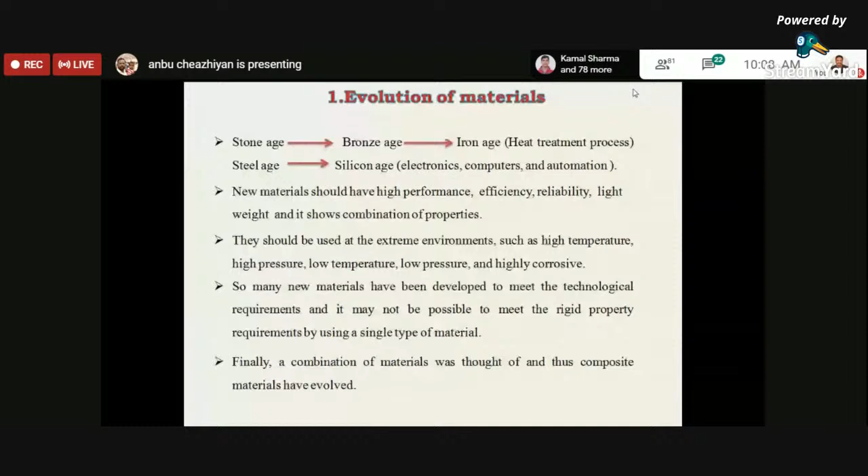Next we go for composite materials. There are a lot of definitions available for composite materials, but technically, composites are heterogeneous at the microscopic level but statistically homogeneous at the macroscopic level. Apart from that, I have given another definition: composite materials are those which are formed from two or more materials, producing properties or characteristics that could not be obtained from any one material.

Technically, composite materials are heterogeneous at a microscopic level but statistically homogeneous at a macroscopic level. Various materials that have dispersed phases exist in nature, such as metals, alloys, and processed polymers, but we cannot call these composites because their properties are similar to those of the base constituents. For a material to be a composite, certain conditions should be satisfied. The first is that the combination of materials should result in a significant property change.

Another is that the content of constituents is generally more than 10%. The third is that the property of one constituent is much greater than the corresponding property of the other constituents. These conditions must be satisfied for it to be a composite material. We have different types of composites: metal matrix composites, ceramic matrix composites, and fiber reinforced composites. Based on the application, researchers focus on several of these.

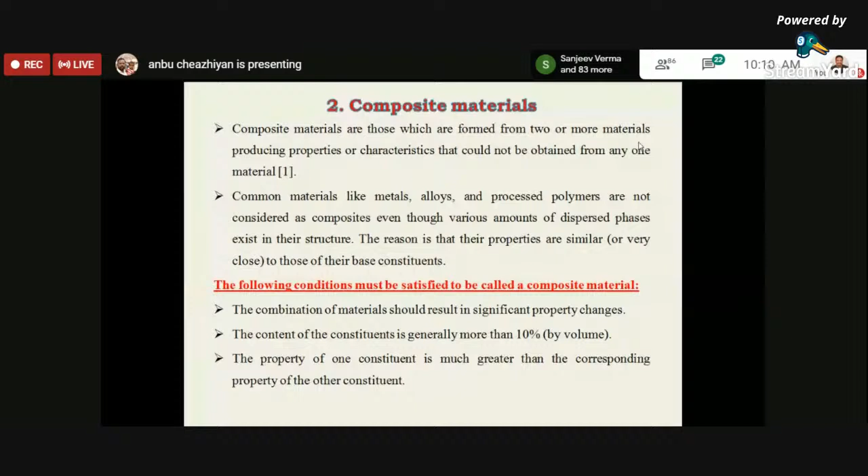Metal matrix nanocomposites are materials that incorporate nano-sized particles into a matrix of standard material, that is, a metal matrix filled with nanoparticles. The biggest advantage of nanoparticles is that we can improve the strength compared to polymer matrix. High strength, modulus, wear, and high temperature can be improved significantly. Using nanoscale reinforcement, general properties such as tensile and compressive behavior can be increased.

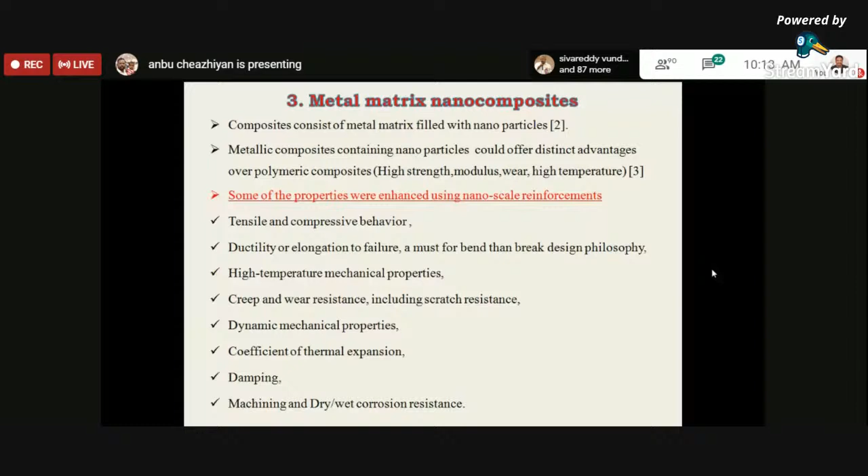These are the challenges facing the development of metal matrix nanocomposites. The greatest challenges for wide application are the cost of nanoscale reinforcement and the complexity of synthesis and processing of nanocomposites. For the properties of metal matrix nanocomposites to be increased, there should be uniform distribution of reinforcements, a suitable volume fraction of reinforcement, and good interfacial strength between the matrix and reinforcements.

So as I told you earlier, the processing of nanocomposites is very difficult because particle agglomeration, or formation of clusters, will occur. So this is a major drawback in nanocomposites. This has been resolved by varying the process parameters, such as stirrer design, stirrer speed and stirring time, and also by using the vortex method we can resolve

some problems. Also, nano-sized particles have high surface area. Due to that, the nano-sized particles naturally tend to agglomerate to reduce the overall surface energy, making it difficult to obtain uniform dispersion. So that is a major problem. Another thing is, as we increase the percentage of reinforcement, the surface area of the particles tends to increase, and hence particle agglomeration. A minimum amount of agglomeration can be seen in the matrix material.

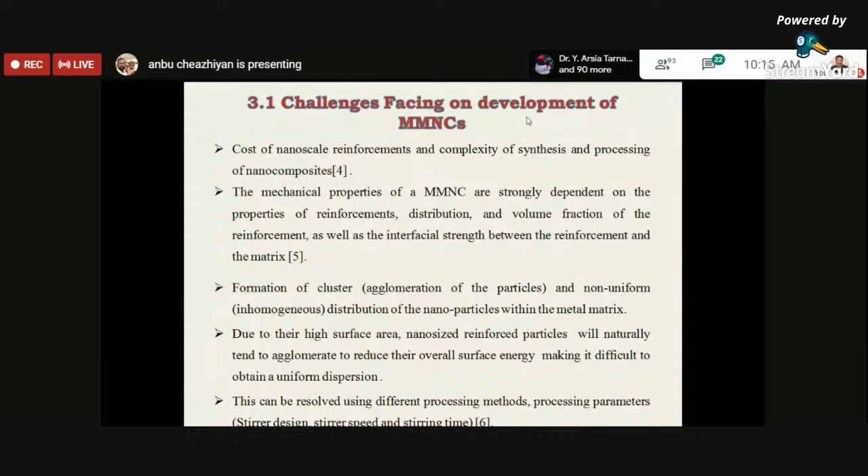So next I'm going to discuss the mechanisms of nanocomposites. The yield strength of a metallic material is the stress required to move dislocations and to activate dislocation sources. Generally, metal matrix composites are strengthened by Orowan strengthening, enhanced dislocation density, load bearing effects, and grain boundary refinement. These are called strengthening mechanisms.

In the Orowan mechanism, it is the obstacle caused by closely spaced hard particles to the movement of dislocations. In conventional micron-sized particle reinforcement, the reinforcement particles are coarse and the interspacing is large. But in the case of nanoparticles, it is favored with highly dispersed particles.

Next we will see enhanced dislocation density. Thermal stresses arise around the particles, because the matrix and reinforcements are characterized by different coefficients of thermal expansion. The stress level is often large enough to cause plastic deformation in the matrix-reinforcement interaction region, thus inducing high dislocation density.

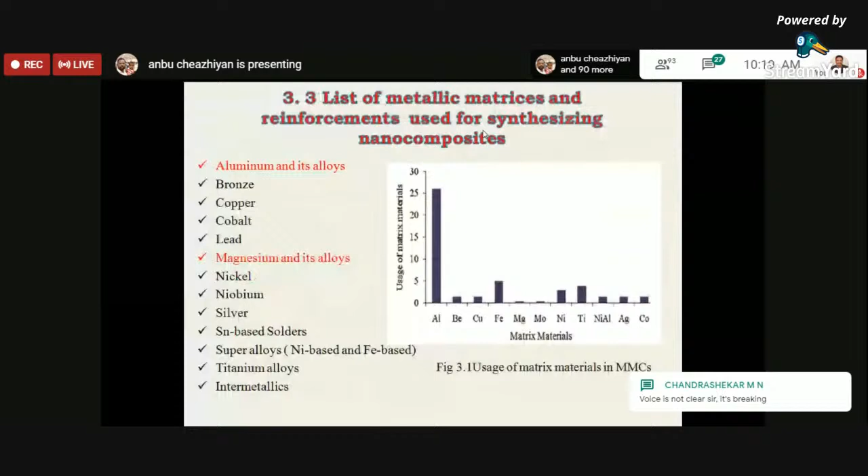Sorry to disturb you, sir. Excuse me, sir. Hello. Sir, your voice is not clear, it is slightly breaking. Actually, there was some connectivity problem. Is it right now? Yes, sir, now it's okay. Okay, so then I have to keep my mic.

Okay, so these were the common metal matrices used for synthesizing nanocomposites: aluminum and its alloys and magnesium and its alloys. Aluminum and magnesium have lower density: aluminum is 2.7 grams per cubic centimeter, magnesium is 1.8 grams per cubic centimeter. By including low density materials, we can further reduce the density of composites. That is the objective of the researchers.

In most of the research on matrix materials, aluminum is used, and then magnesium. Synthesizing magnesium is limited because it's very difficult: during synthesis, when it reacts with oxygen, it forms oxides, and it is highly pyrophoric in nature. Because of that, they didn't go for magnesium matrix, but using new processing methods, researchers have concentrated on magnesium matrix. Now a lot of research papers are coming out on magnesium matrix composites.

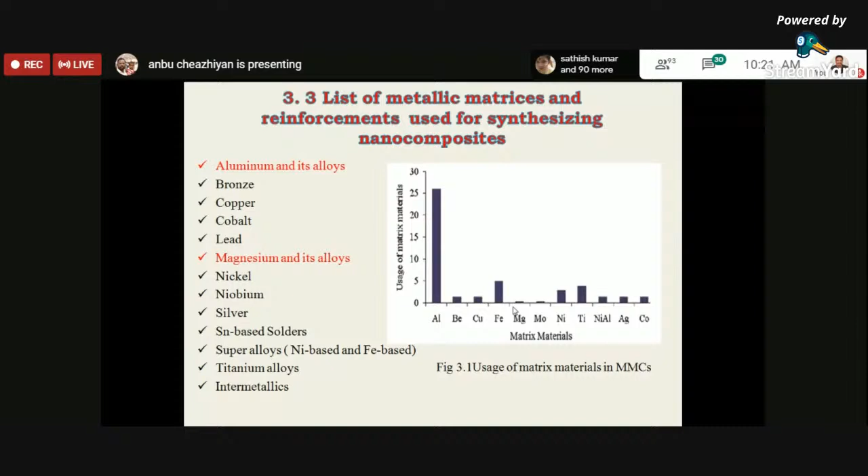Sometimes they go for the addition of two reinforcements, hybrid composites. In that, they go for another reinforcement called boron nitride, whose density is very low, and sometimes they go for molybdenum disulfide or graphite. They act as good solid lubricants, especially used to improve wear resistance and corrosion resistance properties. So I have given the types of reinforcement.

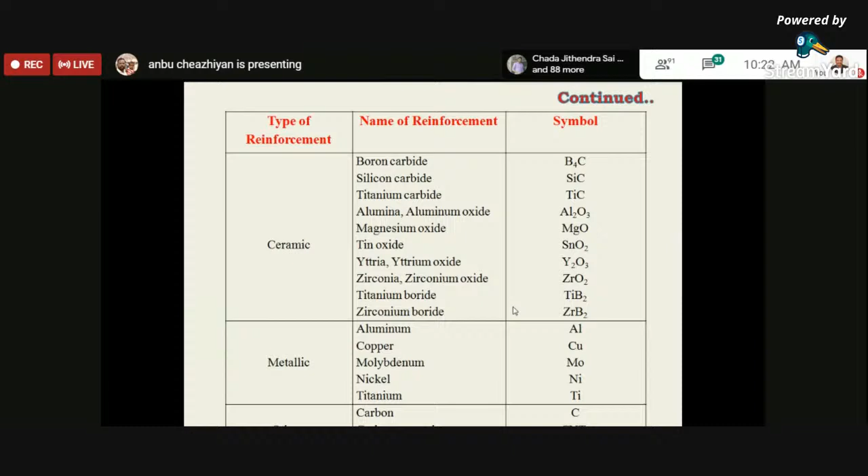For selecting the reinforcement for synthesizing nanocomposites, the following conditions should be satisfied. This is a general thing. It should increase the yield strength and tensile strength at room temperature or elevated temperature while maintaining ductility. Next is increase of creep resistance at elevated temperature, increased fatigue strength, improvement of thermal shock resistance, improvement of wear resistance, increase of Young's modulus or reduction of coefficient of thermal expansion. These are the things we need to consider while selecting nanoparticles for synthesizing nanocomposites.

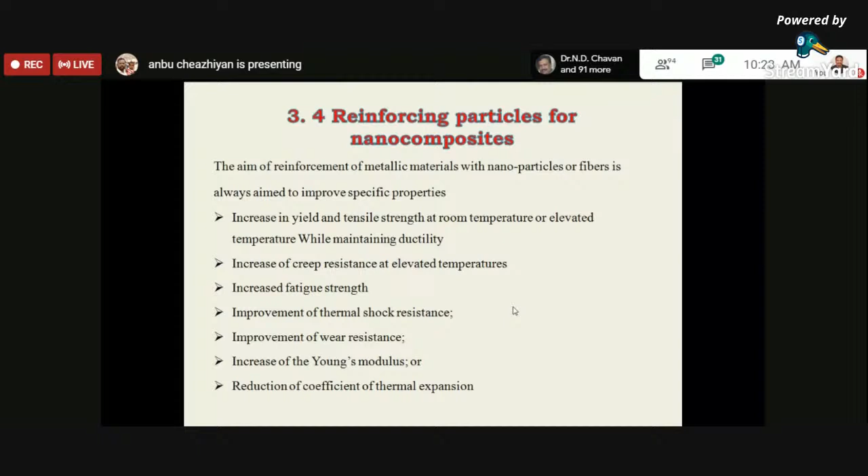So here I have given aluminum matrix composites. As you all know, aluminum matrix composites are widely used in automobile, marine, and transport industries due to high strength to weight ratio, good stability and formability, high elastic modulus and thermal conductivity. It is also known that the mechanical strength can be increased by precipitation hardening.

So this is aluminum, and these are the major alloying elements that can be added along with aluminum: copper, zinc, magnesium. Here these are the series: 99% aluminum, aluminum copper alloys, aluminum manganese alloys, aluminum silicon alloys, aluminum magnesium alloys, aluminum zinc alloys, and lithium alloys. This is a recent material that we are evaluating, since the density of lithium is very low compared to the others, but it is highly pyrophoric in nature.

These aluminum alloys are used in various industries, but we are concentrating on marine applications, that is superstructures, structural components, assembly nodes, components for mechanical functions, and especially in the manufacture of ribs, hulls, all those things.

There is a major drawback in this aluminum. At aging temperature, the coherency between the precipitate and matrix lattice disappears due to the growth of reinforcing particles, and hence it loses the hardening effect. As a consequence, the strength of the alloys decreases, mostly at 200 to 300 degrees centigrade. In that case, the inclusion of ceramic reinforcement tends to increase such properties.

So this is the experimental methodology that we have found. Aluminum alloy Al7075 is used as a matrix material, and there is a chemical composition.

Here we have used aluminum with boron carbide and boron nitride as reinforcement. We have varied the percentage of boron carbide at 3%, 6%, and 9%, and kept boron nitride constant at 3%. The particle size of boron carbide and boron nitride is less than 50 nanometers, which is commercially available from the market, from Sigma Aldrich, and used as reinforcement.

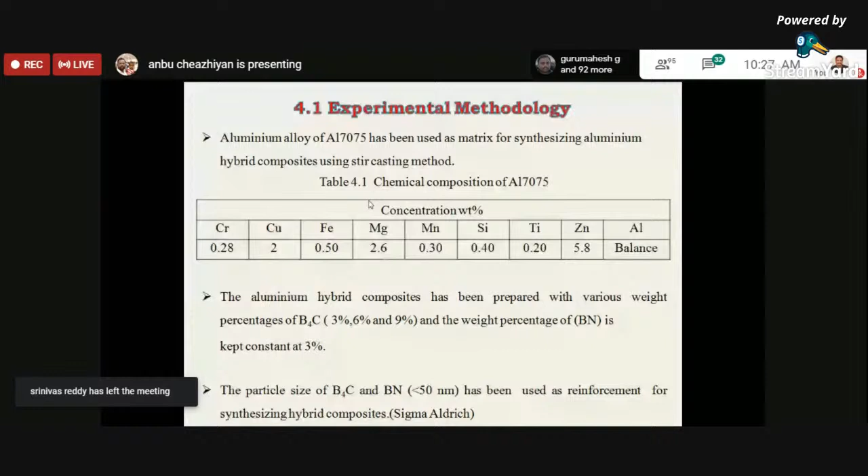These are the processing methods followed for synthesizing aluminum hybrid composites. Al7075 alloy is melted in a resistance heating furnace at 700 degrees centigrade.

Since there is magnesium content in the alloy, it should not be oxidized, so we have gone for an inert atmosphere environment. We supplied argon and SF6 gas at a minimum of 3.5 liters per minute. Since magnesium enhances the wettability of matrix and reinforcement, it should not be oxidized, so for that purpose we have gone for a closed environment setup.

In order to have a homogeneous melt, the temperature is increased to 750 degrees centigrade. Then the reinforcement particles are preheated to 350 degrees centigrade to remove moisture present in them, which also helps avoid oxidation. We then increased the temperature of the melt to 850 degrees, the maximum limit.

Then we added reinforcement of boron carbide at 3%, 6%, 9%, with a constant 3 weight% of boron nitride, through an external screw into the molten space. The stirring speed and stirring time were maintained at 600 rpm and 20 minutes respectively, in order to obtain homogeneous distribution of reinforcement in the matrix melt.

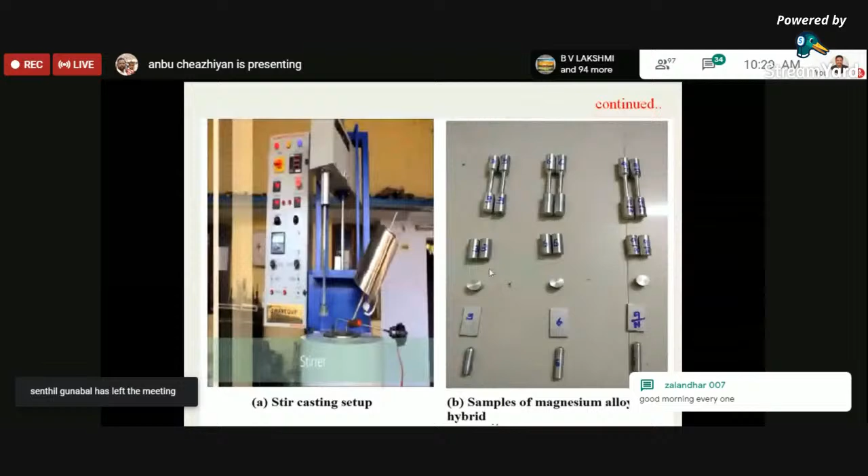These are the stir casting setup that we have used, and these are the materials performed as per ASTM standards. We have two sets of samples prepared for tensile, compressive, hardness, corrosion, and wear resistance testing.

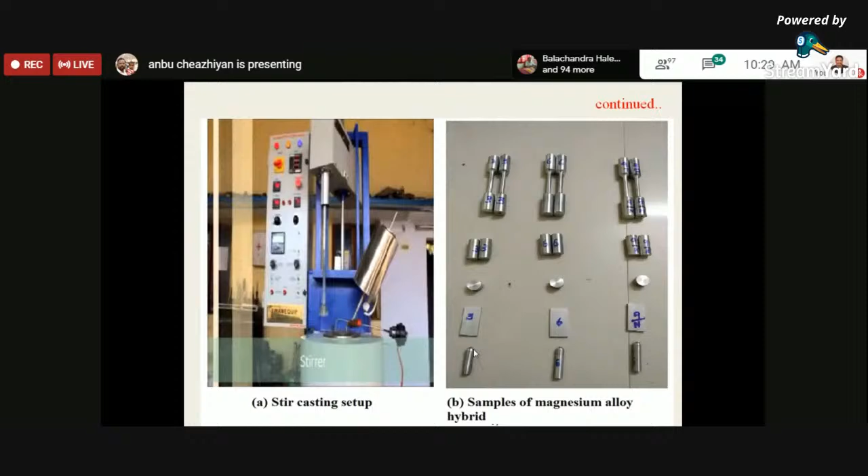These are the performance measures. The optical microscope has been used to study the microstructures, and scanning electron microscopes are used to find the distribution of matrix and reinforcements. Vickers micro hardness test has been used to study the hardness of composites, and the universal testing machine (UTM) is used to study the tensile and compressive strength of composites.

This is the salt spray test chamber that we use to find the corrosion properties of aluminum hybrid composites. Since these materials are mainly used for marine applications, as I told earlier, we have gone for the salt spray apparatus.

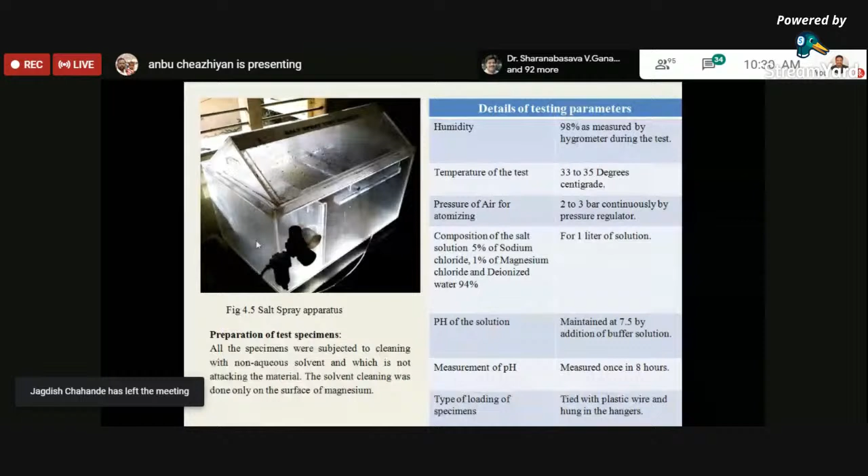These were the testing parameters maintained for corrosion resistance: 98% humidity measured by hygrometer during the test, temperature maintained at 33 to 35 degrees centigrade, and pressure of air at 2 to 3 bar. We applied a salt solution of 5% sodium chloride and 1% magnesium chloride in deionized water, for 1 liter of solution. Every few minutes it will spray automatically.

So that is the sprayer. All the specimens were subject to cleaning with a non-aqueous solvent which does not attack the materials. The solvent cleaning was done only on the surface of the aluminum, sorry, the magnesium, as I mentioned.

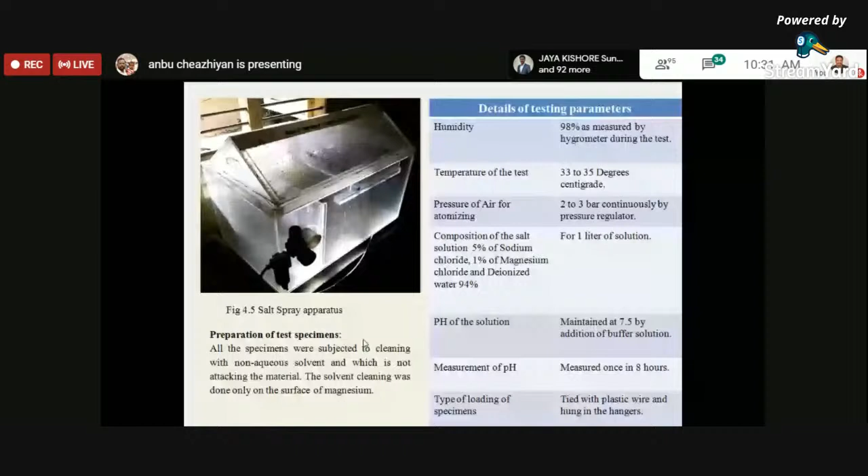It is clearly evident that at increased temperature of molten metal, the reinforcement particles cannot be dissolved to maximum, and hence it appears as a fine globular species in some regions of the matrix alloy. So it appears that it can be dissolved fully, so that it appears as a fine globular species in the matrix.

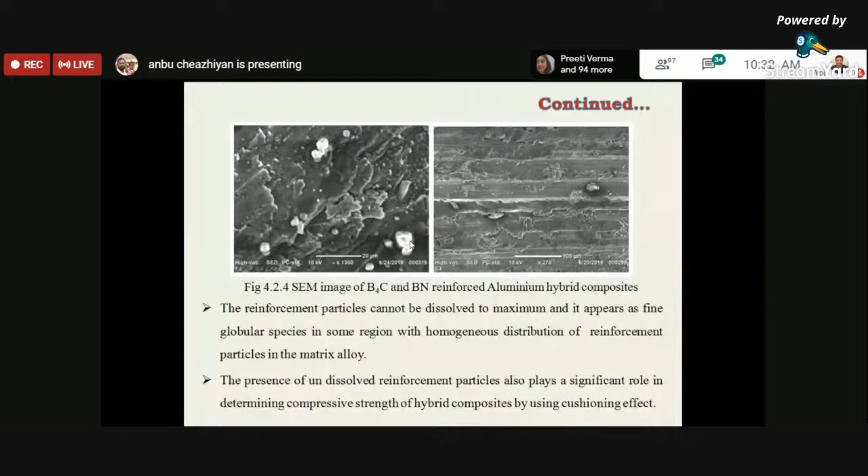This can also be used as a good behavior in compressive strength. It also shows that the matrix aluminum shows a fine interdendritic pattern of grains and are precipitated at the grain boundaries.

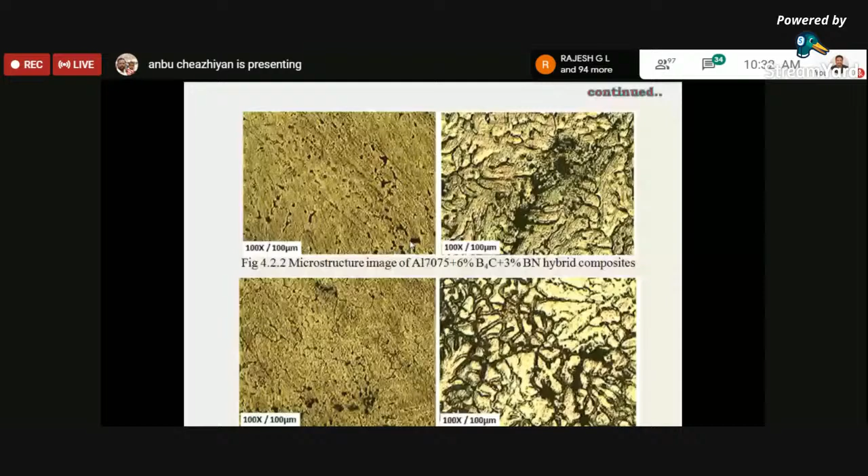From the XRD analysis, it is clear that the strengthening mechanism occupies an important place in enhancing the mechanical behavior of aluminum hybrid composites. Here, the presence of boron carbide and boron nitride interacts with aluminum to form Al3BC, AlB12, and AlN interface reaction, and this is the strengthening mechanism which enhances the mechanical properties of synthesized composites.

In that material, we also have aluminum and copper. The presence of copper interacts with aluminum to form Al2Cu. That is mainly used for corrosion resistance. It acts as a barrier, so that has not been found to be an issue.

Next we'll go for hardness of aluminum hybrid composites. The hardness of hybrid composites is increased due to uniform distribution of reinforcements in the matrix alloy, the presence of hard interface particles, and a large difference in thermal expansion between the matrix and reinforcements, which significantly increases the dislocation density in the microstructure of synthesized composites.

In addition, the inclusion of boron nitride, a solid lubricant, also contributes to increasing the hardness of composites. It acts as a barrier along with boron carbide and inhibits the presence of dislocation during indentation. So the hardness of aluminum hybrid composites has been significantly improved compared to the monolithic material.

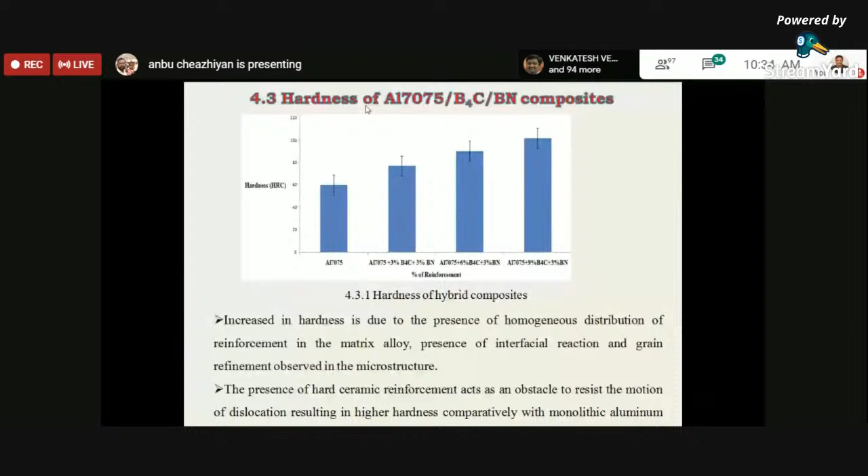Next we go for tensile strength of aluminum hybrid composites. It has been observed that with increase in reinforcement, the ultimate tensile strength increases and the percentage of elongation is reduced. This occurs due to the strengthening mechanism, adequate load transfer between matrix and reinforcements, Orowan strengthening mechanism, and finally the grain refinement and dissimilarities among the thermal elastic performance of synthesized composites.

Here the inclusion of secondary reinforcements exhibits heterogeneous nucleation sites, and hence the further deformation of hybrid composite has been increased significantly. So the percentage of elongation is decreased due to increase in percentage of reinforcements.

Due to the grain refinement achieved by hard ceramic reinforcement, this tends to reduce the superplasticity effect, and hence the brittleness of the composite has increased. This is considered to be a major reason for the reduction in percentage of elongation.

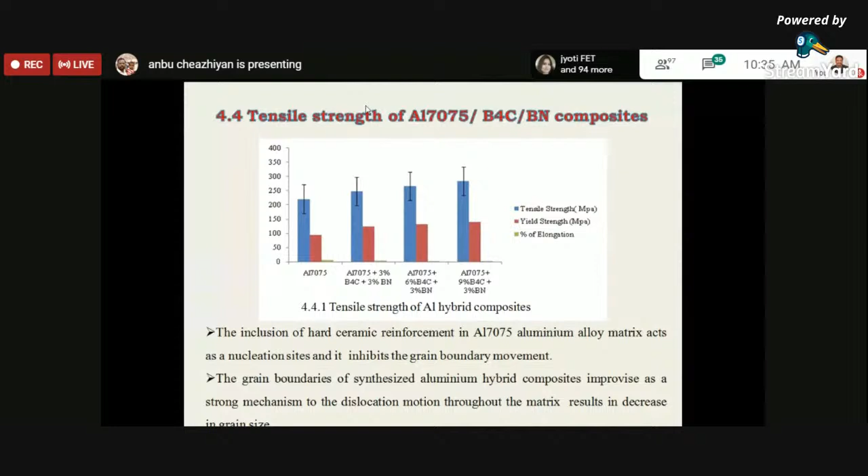So that is the thing I have here regarding the inclusion of secondary reinforcement causing heterogeneous nucleation effects.

During straining, the inclusion of secondary reinforcements disintegrates the strain rate of hybrid composites, and hence the fracture surface of hybrid composites appears to be smooth.

It is also found that because of heterogeneous nucleation, the deformation of synthesized composites occurs at the grain boundaries, and it exhibits plastic deformation which resists the nucleation of grain at the time of compressive loading. So you can see some of the grain refinement which are seen in that figure.

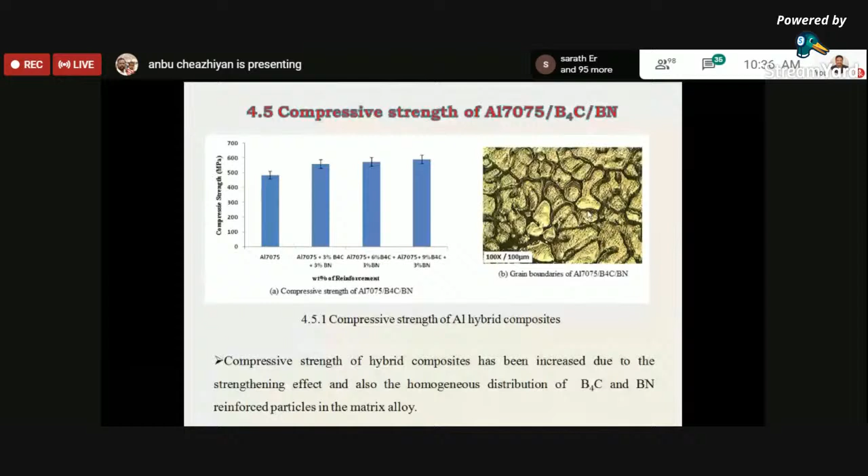Next we go for corrosion resistance. As you all know, aluminum alloys possess high affinity to oxygen, and it is treated as a reactive material. The presence of copper interacts with aluminum to form Al2Cu. This acts as an obstacle for dislocation.

This phase performs reduction of corrosion when the pH is increased. Owing to the disintegration of aluminum, the alloys through the surroundings act as a cathode. This can be overcome by adding suitable ceramic reinforcement or harder ceramic reinforcement.

In these cases, we have added the harder and stiffer reinforcement along with the matrix alloy. Due to that, the corrosion properties of hybrid composites have significantly increased. Additionally, the inclusion of secondary reinforcement acts as a heterogeneous nucleation site and acts as a barrier to reduction in grain growth, and hence the grain size of the composite has decreased. This is also considered an important factor in the increase of corrosion resistance of aluminum hybrid composites.

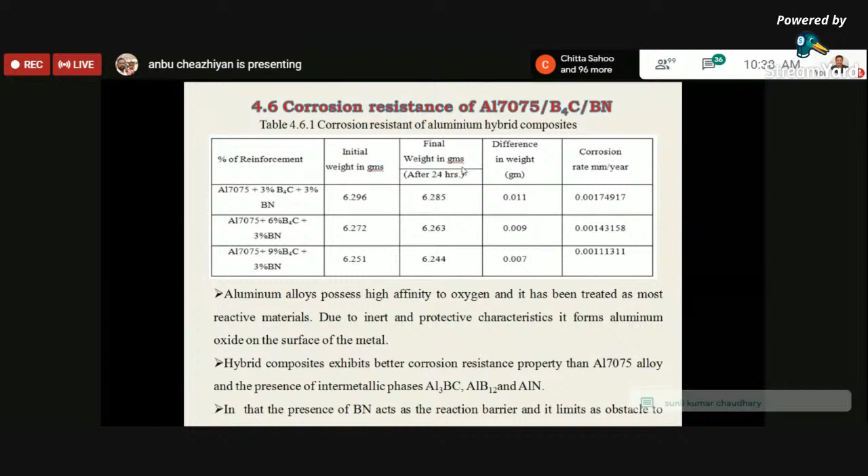Next we will go for wear properties of aluminum hybrid composites using boron carbide and boron nitride reinforcements. Pin on disc wear testing was carried out under dry conditions as per ASTM G99. A sample size of 6mm diameter and 35mm length, steel material EN31, with a surface roughness of 0.3, is used.

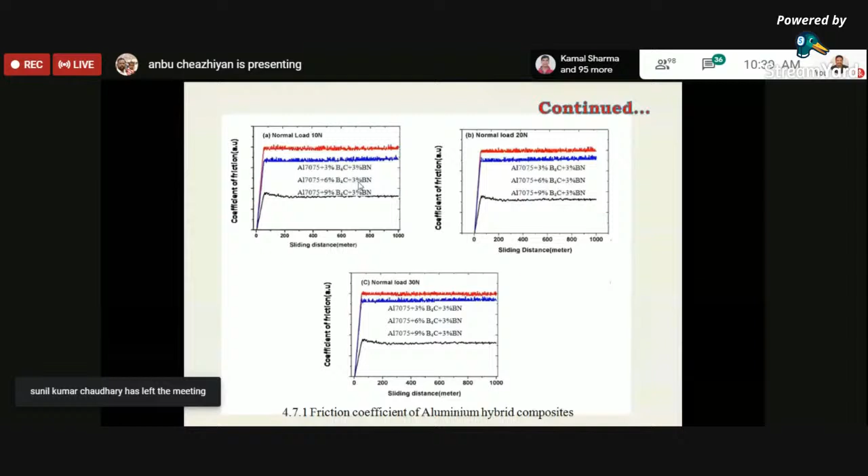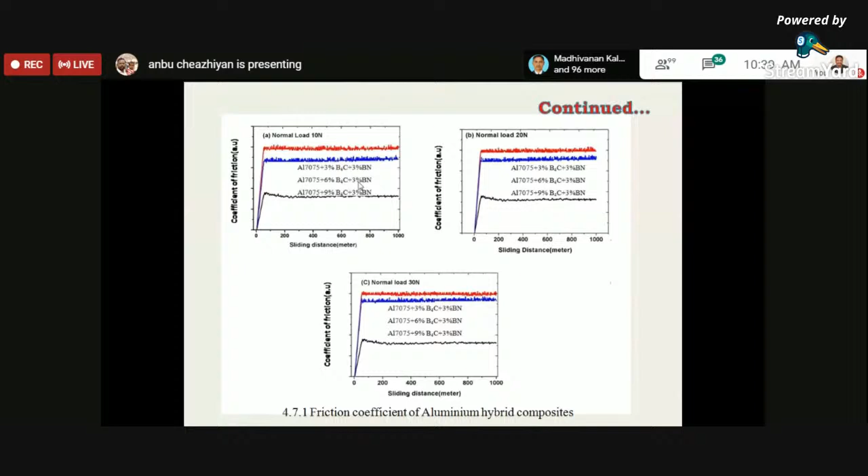The friction coefficient for each material has increased. Using the formula, we calculated the friction to be 0.46 to 0.47 for hybrid composites. The coefficient of friction increases due to the strengthening effect of matrix and reinforcement, and also because dislocations in the alloys become ineffective, causing an increase in hardness, which is the most important factor to enhance wear resistance.

Next, we'll go for worn surface morphology. The worn surface of all specimens under variable load were covered with grooves parallel to the sliding direction, along with some plastic deformation. These grooves are associated with abrasive wear, in which hard asperities on the steel counterface, between the pin, cause wear by removal of material.

It is also observed that due to the presence of hard reinforcement, the presence of adhesive wear is less, and hence the total depth of deformation is smaller in hybrid composites. In addition to grooving, some local plastic deformation and material smearing were observed.

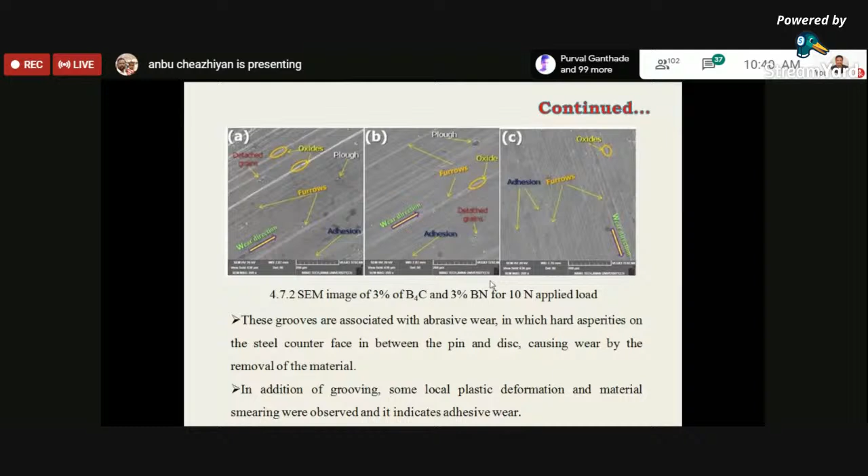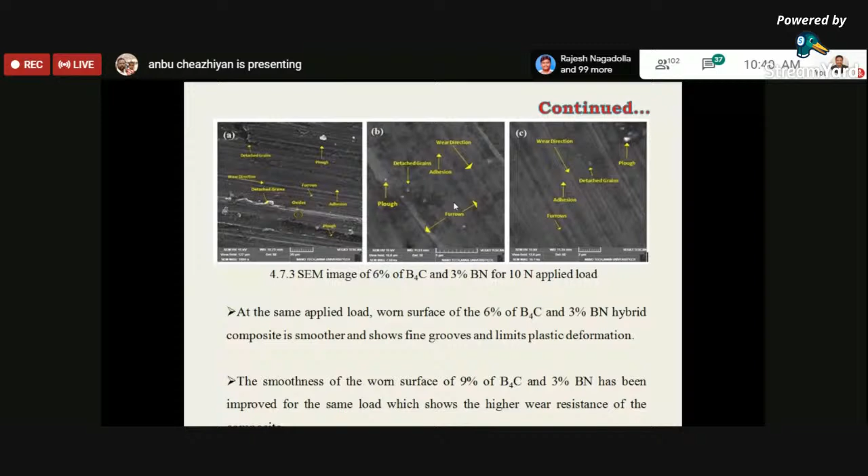In the case of 9% reinforcement, it is further improved. It is observed that the enhancement of wear resistance is due to the improvement of load-bearing capacity of reinforcement particles, and the formation of a transfer layer between matrix and reinforcement, which protects the surface from abrasion.

It is also noted that when the load is increased from 10 to 30 Newton, the worn surface of the synthesized composites gradually shows less adhesive wear and shallow scratches on the composites.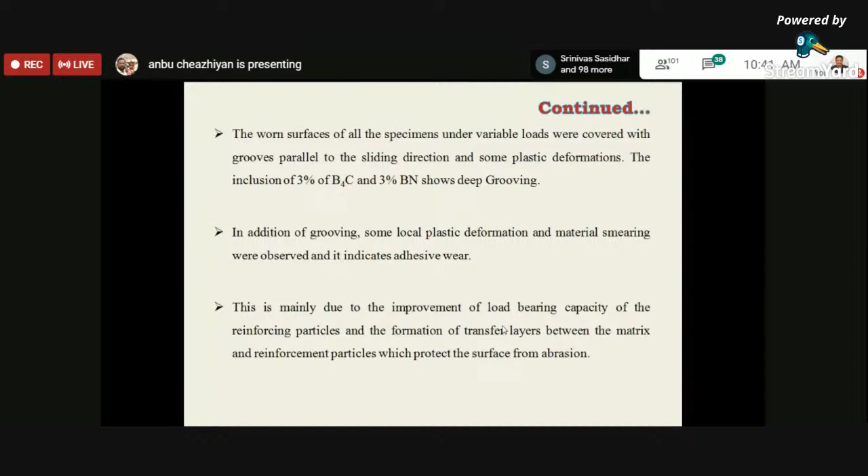Again, it is concluded that the worn surface of all specimens under variable load were covered with grooves parallel to the sliding direction, along with some plastic deformation. The inclusion of 3% boron carbide and 3% boron nitride shows deep grooving, compared to 6% and 9%, where there is grooving with some plastic deformation and material smearing, due to the load-bearing capacity of reinforcement. The formation of a transfer layer between matrix and reinforcement protects the surface from abrasion.

It has been concluded that the nano-sized boron carbide and boron nitride particles are uniformly distributed in the matrix, with a few clusters found around regions of aluminum grain boundaries. They form interfacial reactions as Al3BC, AlB12, and AlN. This acts as a strengthening mechanism to enhance the mechanical properties of composites.

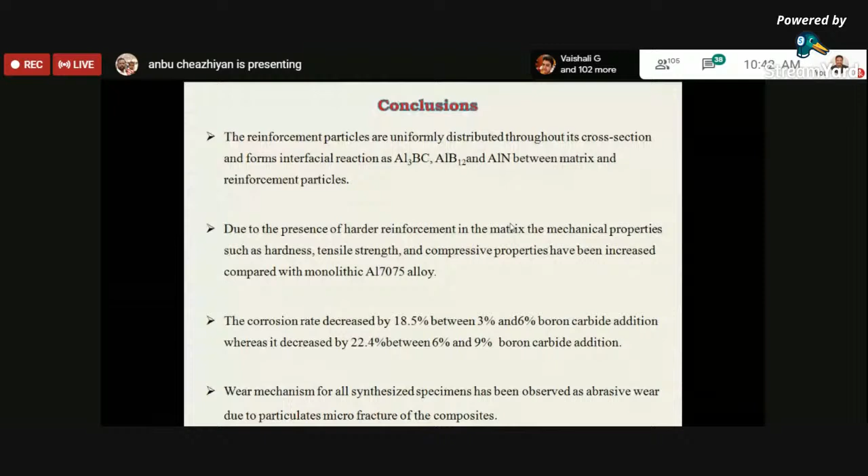Due to the presence of harder reinforcement in the matrix, mechanical properties such as tensile strength and hardness of the composite have increased compared to the monolithic material. The corrosion rate decreased by 18.5% between 3% and 6% boron carbide addition, whereas it decreased by 22.4% between 6% and 9% boron carbide addition.

The wear mechanism of all synthesized composites has been studied by varying loads and different speeds. These were the conclusions we have drawn, and these papers have been published in the Journal of Materials Research and Technology.

So next, as I told you, we'll go for a light, low density material: magnesium nanocomposites. As we know, magnesium is a low density material when compared to aluminum, at 1.8 grams per cubic centimeter, but the major drawback is that it is difficult to synthesize.

Research on magnesium materials is increasing exponentially because magnesium degrades naturally, and its Young's modulus is 40 gigapascal, similar to that of human bone. It is a hexagonal close-packed structure material. The strength is moderate but it has poor formability. So by adding suitable reinforcement, we can increase the mechanical properties of magnesium composites.

It is also known that magnesium is very light, about 30% lighter than aluminum and 73% lighter than steel. It exhibits good dimensional stability, machinability, and damping capacity. The major drawback is low strength and poor ductility. This has to be overcome by adding suitable nanoscale reinforcement in the matrix material.

So this is the introduction, as I told. The performance of magnesium alloys has gained interest in recent years due to excellent castability, machinability, electromagnetic shielding, all those things. Here we have used titanium carbide as a reinforcement. Though the density of titanium carbide is high, 4.9 grams per cubic centimeter, we need to increase the strength of the magnesium composite, so we have gone for titanium carbide, which has good strength compared to other materials.

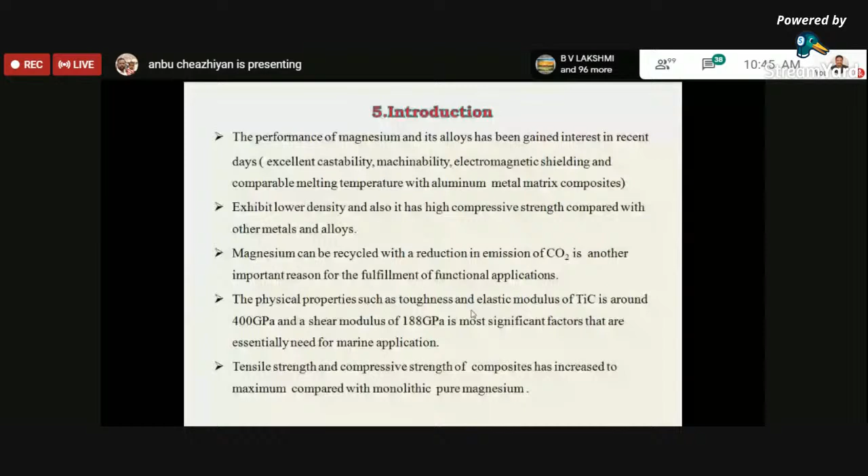So we have tried using titanium carbide as a reinforcement. Sorry, the toughness is 400 gigapascal and shear modulus is 188 gigapascal, and hence the tensile strength and compressive capacity are maximized compared with pure magnesium. For that consideration, we have used titanium carbide as a reinforcement.

This is the objective: to develop titanium carbide reinforced magnesium nanocomposites by varying its weight percentage at 3, 6, and 9% using the powder metallurgy method for marine applications, and to study the microstructure and mechanical properties of the synthesized nanocomposites.

Here we are using powder metallurgy. The reasons are improved control of the volume fraction of reinforcement, uniform distribution of reinforcement, improved control over grain size, and lower energy consumption during processing. At the nano level, powder metallurgy is the promising process; the mechanical properties of magnesium are improved by dispersion hardening with stable nano titanium carbide particles.

So this was the need for the study. As I told you earlier, it has low elastic modulus, low ductility, and low corrosion resistance, which limits its use in engineering applications. To overcome this, we are adding a suitable nano reinforcement to the material.

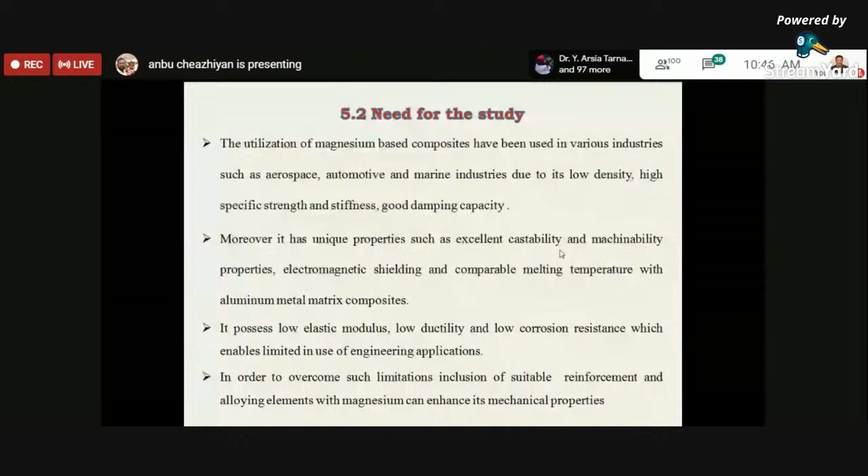This is the experimental methodology. We used a vacuum furnace setup along with argon, an inert atmosphere. When magnesium interacts with oxygen, it forms oxide, so it can't be used further. For that purpose, magnesium has to be synthesized only in an inert atmosphere.

In the present study, we have not used pure magnesium. We used AZ91 magnesium alloy powder, a die casting material with 9% aluminum and 1% zinc, hence AZ91. The powder size is 40 nanometer and the titanium carbide is 45 nanometer, available from Sigma Aldrich.

The compaction pressure was maintained at 250 megapascal for 15 minutes at 250 degrees centigrade, followed by sintering. The sintering temperature was maintained at 650 degrees, and sintering was carried out for 8 hours continuously, in order to get the material

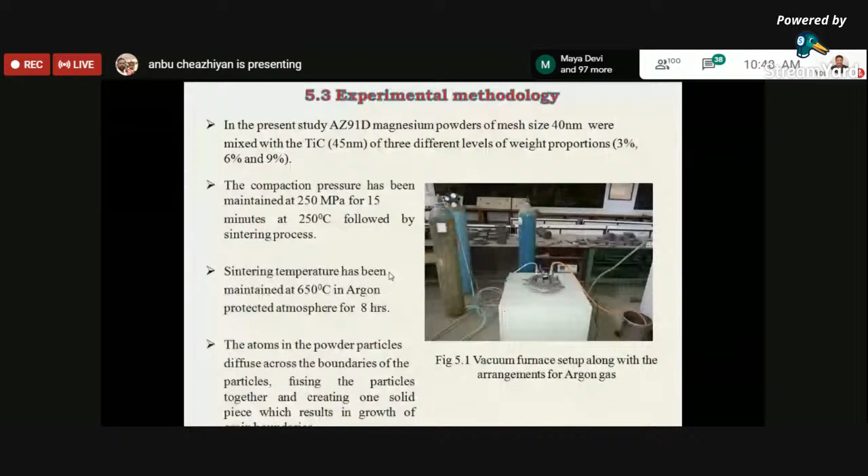diffused. During that, the atoms in the powder particles diffuse across the boundaries of the particles, and hence fusion of particles takes place, creating one solid body, which results in growth of grain boundaries.

These are the samples that we have obtained: pure AZ91, 3% titanium carbide, 6% titanium carbide, and 9% titanium carbide. These samples have been sintered.

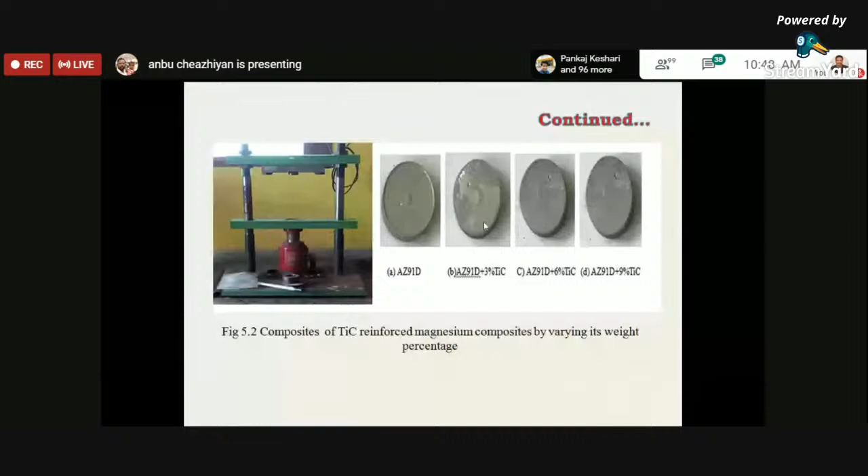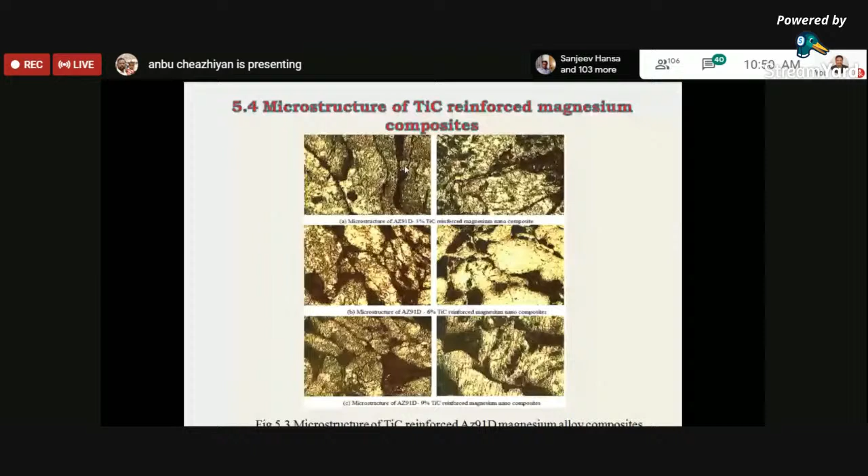So the grains present in the magnesium matrix appear as a lamellar structure. So the grains present in the magnesium appear as a fine lamellar structure, and thus significantly increase the mechanical properties of titanium carbide reinforced magnesium alloy composites.

And it's also noted that the slip bands are blocked due to the presence of solutes in the grain boundaries, and the presence of the titanium carbide phase acts as an obstacle that hinders the motion of dislocation, and it is considered to be a significant factor to enhance the mechanical properties of developed composites.

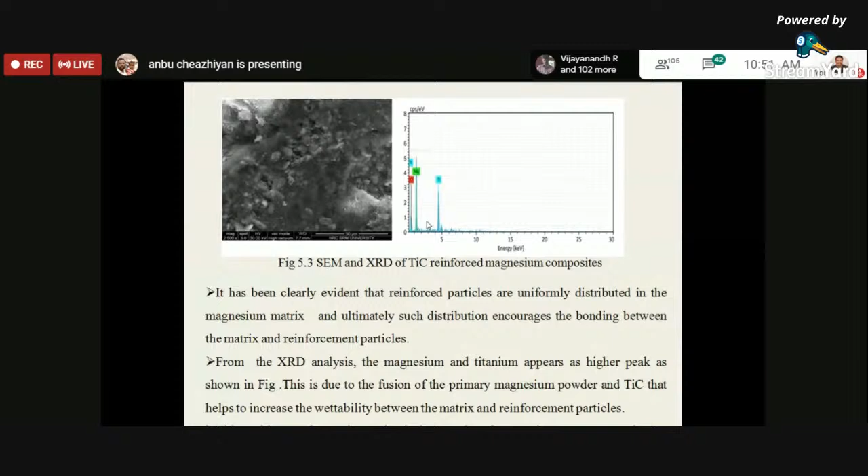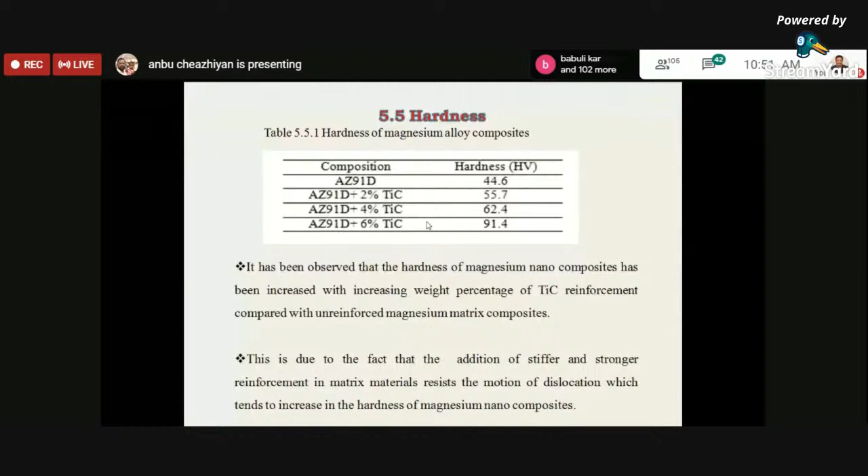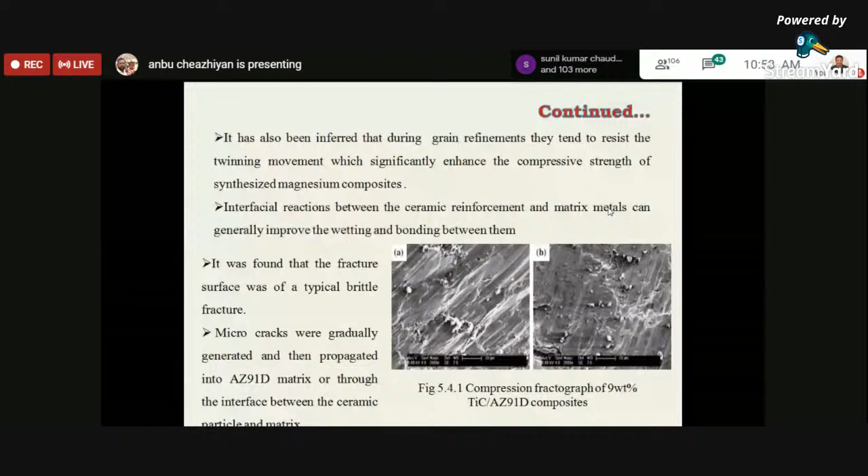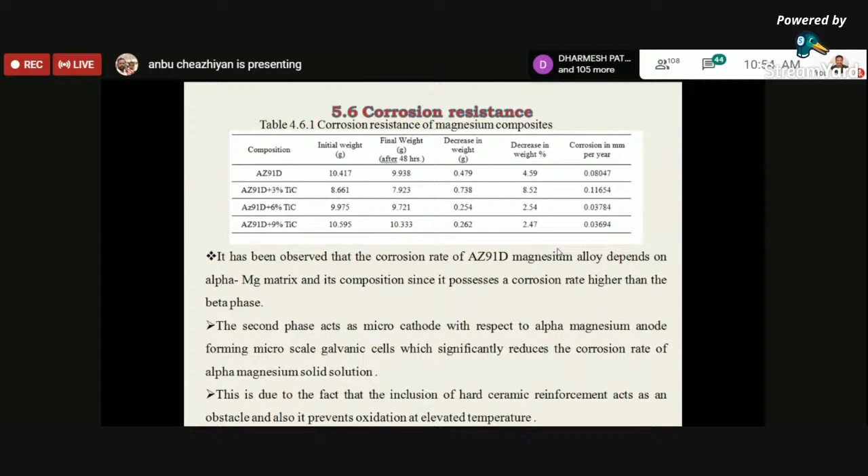The second phase acts as a micro cathode with respect to the alpha magnesium anode, forming a microscale galvanic cell, which reduces the corrosion rate of alpha magnesium. This is due to the fact that the inclusion of hard ceramic acts as obstacles, and it prevents oxidation. So that is a major reason for improving the corrosion resistance.

So next we have gone for synthesis and characterization of nano glass particles reinforced AZ91D magnesium alloy composites using solid phase methods. Here the objective is to develop nano glass particles reinforced magnesium composites using weight percentages of 4, 8, and 12% using powder metallurgy for marine applications.

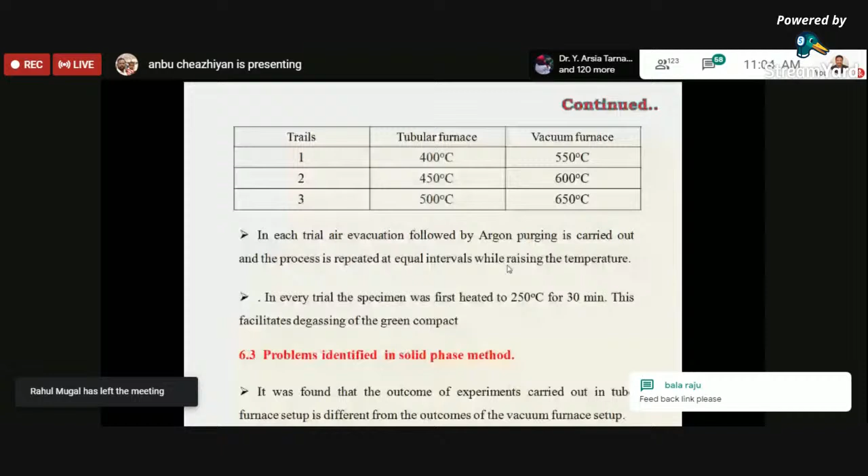It was found that the outcome of the experiment carried out in each furnace setup is different. The tubular furnace result is different from the vacuum furnace. Residue is obtained from the tubular furnace at 400 degrees centigrade with the soaking time, but the sintering quality was slightly improved. If we try to increase the temperature to 500 degrees centigrade, it tends to burn. That is the major drawback. We considered that it may happen due to the lower temperature.

So we tried to increase the temperature, and we tried to go for another setup, the vacuum furnace setup. There we first increased the temperature from 400 to 500. In the vacuum furnace setup, the same results were observed, but the sintering temperature was increased to 550 degrees centigrade, which could not be achieved in the tubular furnace. In the first trial we increased to 400 degrees centigrade, and in the vacuum furnace we increased the temperature, and the sintering quality has been improved.

And again, we have gone for 550 degrees centigrade with a soaking time of 1 hour. The specimen showed cracks which were similar to that made using.

So here, first we have gone for powder metallurgy methods. So in that the objective is to develop nano glass particles reinforced magnesium composites by varying its weight percentage, that is 4, 8, 12%, using powder metallurgy method for marine application, and to study the microstructure and mechanical properties of synthesized composites.

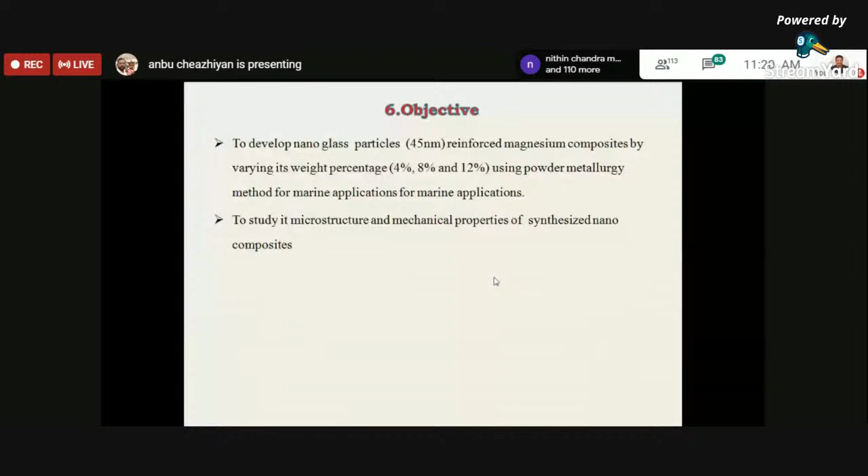So AZ91D as a matrix material, AZ91D has high strength to weight ratio, good ductility, better damping capacity, excellent castability, and good corrosion resistance. So based upon these factors, we have chosen AZ91D as a matrix material. And also we have chosen the reinforcement as nano glass particles. It simply seems to be nano hollow particles. Some researchers use these hollow spheres for developing metal foams.

Okay, so the composition of nano glass particles is SiO2, B2O3, calcium oxide, magnesium oxide, and sodium salts. So it's a borosilicate glass. The hardness of this borosilicate glass is very high when compared to the other reinforcements, and hence the corrosion property is very high when compared to other reinforcements. So because of that reason, this is a major thing for considering this as a reinforcement.

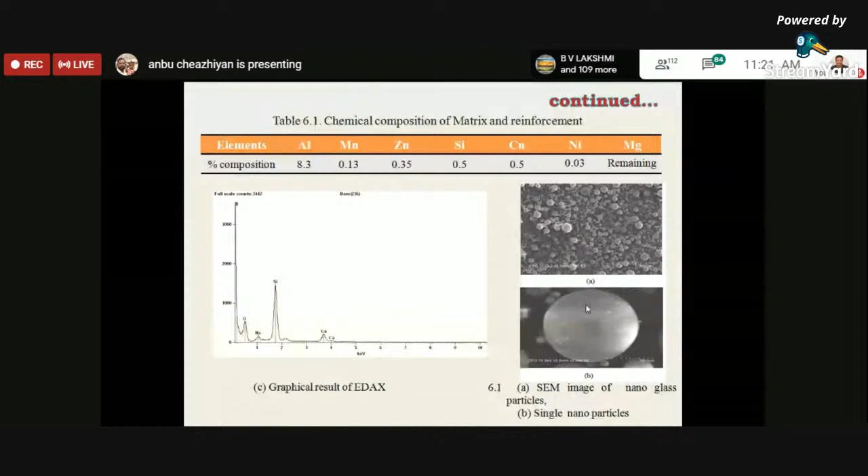So here I have given the chemical composition of AZ91D magnesium alloy powder. So these are the chemical compositions, and this is the borosilicate glass powder. So this is the nano glass particles, and from that we took a single reinforcement, and these are the images that we have obtained from that reinforcement particles.

So here we have blended the reinforcement particles with magnesium alloy powders by varying its weight percentage. It is a borosilicate glass, so the wettability will be very poor, and we need to have uniform distribution throughout the matrix, so in this powder matrix we need to create it before itself. So we took a bowl, and by using a fan-like stirrer, we placed the reinforcement and matrix and stirred well, and from this we obtained this composite powder, and we have used EN24 as a die with dimensions of 30 mm diameter and 20 mm.

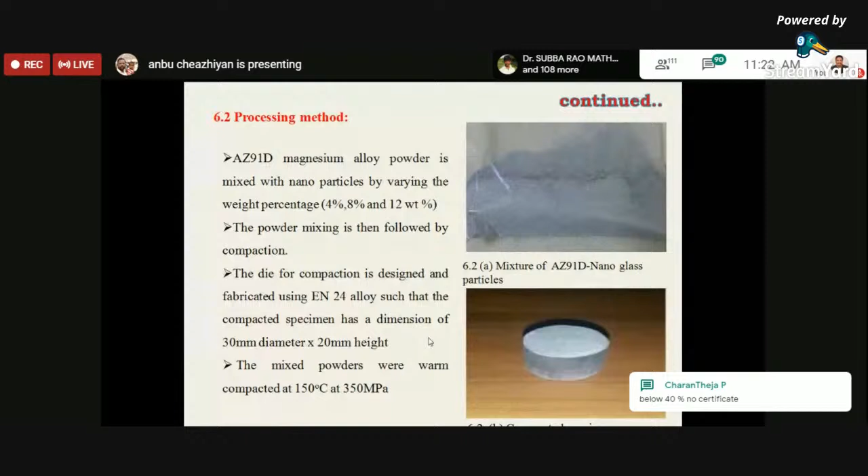And after that, green compaction, and after that, sintering. So before that, we have compacted the green. Warm compaction has been carried out at 150 degrees centigrade at 350 megapascal. We have not increased the compaction pressure here since it's a borosilicate; it should not be broken or tend to deform due to the warm compaction. So we have given 350 megapascals.

So here we have used two furnaces for sintering of nano glass particles reinforced magnesium composites. One is a tube furnace and the other a vacuum furnace. So these are available at NIST. In that the green compact is subjected to the sintering process. To prevent oxidation and excess burning, we are sending argon gas through it.

So this is the setup that we are using, and we have a bubbler unit to control the pressure of the gas flow into it. So this is a tubular furnace, with a boat-like structure.

So we keep the material in that, and we send argon gas into that material. So that is a tubular furnace, and next we have the vacuum furnace. Inside that we are going to keep the material, having an argon atmosphere in a closed environment.

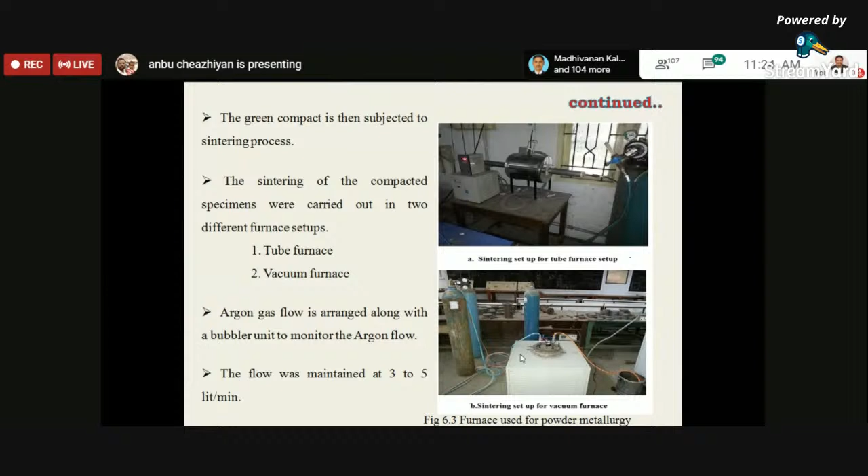Here we sent 3 to 5 liters per minute of argon, taken from the literature. Nowadays they are using CO2 instead of argon, as an inert gas atmosphere, because there may be some oxygen present which can cause the material to oxidize. So instead of that, they are going for CO2.

Three trials have been carried out, each at a different temperature, one using tubular furnace and one using vacuum furnace. In the tubular furnace, we first went for 400 degrees centigrade, next 450 degrees centigrade, and finally 500 degrees centigrade. In the vacuum furnace, we increased the temperature to 550, 600, and 650 degrees centigrade.

The reason is we had not obtained the composite properly, so for that purpose we increased the temperature to 550 degrees centigrade. Before each trial, air evacuation followed by argon purging is carried out, and the process is repeated at equal intervals of time.

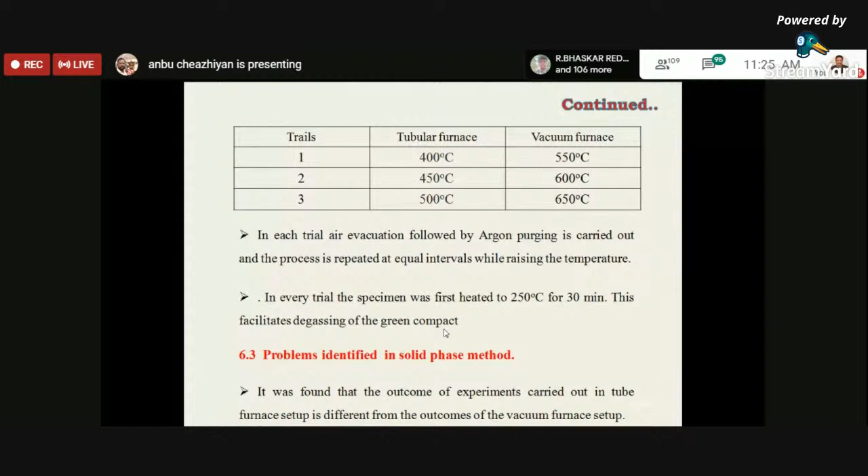First, problems identified in solid phase methods. From the outcome of the experiment, we identified the effect of the sintering process. In a tubular furnace at 400 degrees centigrade with a soaking time of 1 hour, the specimen showed some signs of cracks developed on the side walls.

Due to the escape of volatile matters or due to poor wettability, it forms cracks on the surface of the material. So we decided to increase the temperature to 450 degrees centigrade, keeping the soaking time maintained at 1 hour. But by increasing the temperature from 400 to 450 degrees centigrade, it still showed the same cracks on the surface of the material.

So then we decided to go for 500 degrees centigrade. When we increased the temperature from 450 to 500, the material started burning, so we were not able to get the composite. That is what we obtained in the tubular furnace setup.

After that, we decided to go for the vacuum furnace. We thought: if we increase the temperature, what will happen? So in the vacuum furnace setup, we increased to 550 degrees centigrade, with soaking time maintained at 1 hour. It showed the same cracks similar to those in the tubular furnace. As the temperature was increased to 650 degrees, the specimen started to burn. That is what we obtained.

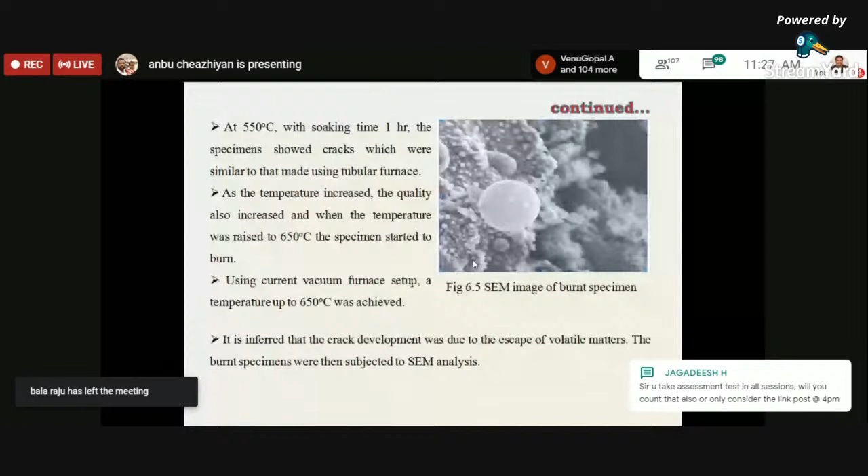It was also observed that in the sintering process, the thermal energy from the external source is transferred from the outer surface to the inner by conduction, and the penetration of infrared radiation is very small, with heat energy deposition limited to the outer surface. Due to that process, the composite cannot be sintered. This results in the core material having lower temperature than the surface, hence poor wettability between the matrix and reinforcement, and hence the material cannot be sintered.

That is the reason we found in the powder metallurgy method. So then we decided to go for the liquid metallurgy method. In liquid metallurgy we have different types: vacuum die casting, squeeze casting, stir casting, centrifugal casting, and so on.

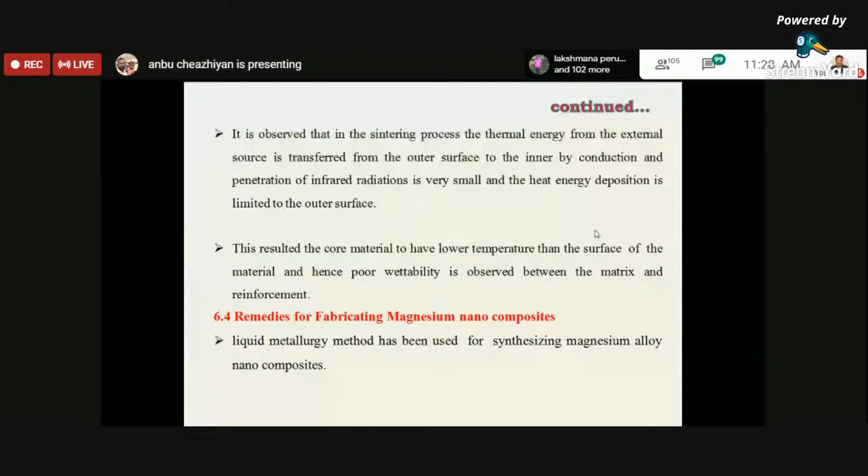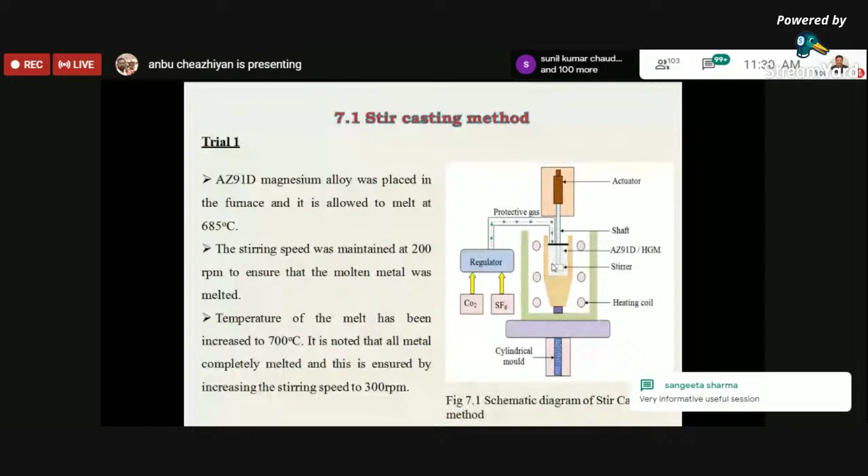Then we have increased the temperature to 700 degrees centigrade, and the stirring speed was increased to 300 rpm.

After that, the nanoparticles are preheated at 450 degrees centigrade in order to remove the moisture and gases present on the surface of the reinforcement particles. After that, the various weight percentages of reinforcement particles are added manually into the melt.

The stirring temperature was increased to 700, stirring speed was increased to 400 rpm, and it was maintained for 5 minutes. Finally, the molten slurry is poured into the die cavity. The die is coated with sulfur to prevent oxidation, and it is placed near the bottom of the sprue to minimize the interaction between the molten composites and the atmosphere during gravity pouring.

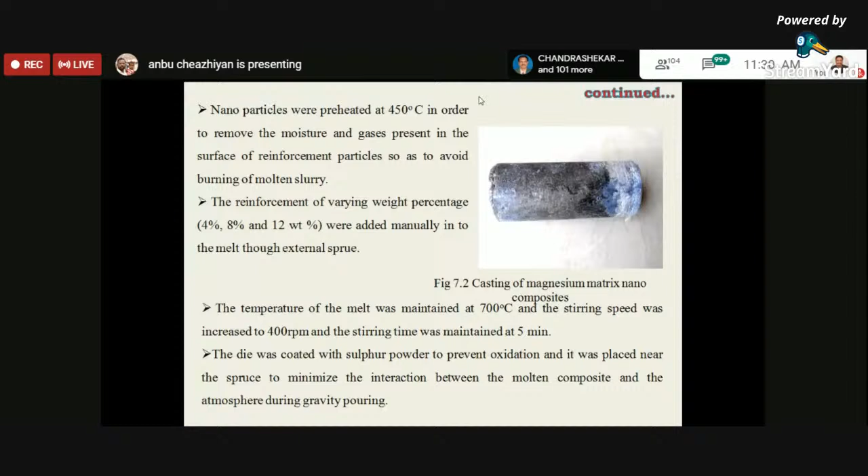These are the things that we observed by seeing the microstructures. Clustering of nano glass reinforcement particles has been observed in the microstructure at a stirring speed of 400 rpm, stirring time 5 minutes, and a temperature of 700 degrees centigrade. The presence of clusters is due to surface tension effect, so it was decided to increase the process parameters: the stirring speed, stirring time, and temperature.

The stirring speed was increased to 500 rpm, and the stirring time was maintained at 10 minutes. Again the reinforcement particles were found clustered in some regions. It is also noted that apart from stirring, the temperature and the mass fraction are also considered important to avoid clustering.

The interface particle distance increased by increasing the speed of the stirrer. From that, it is identified that we have increased the stirring speed to a maximum of 600 rpm and made it 15 minutes stirring time, and the temperature of the melt was increased to 750 degrees centigrade, and it was casted. From that, a maximum amount of uniform distribution of reinforcement particles was obtained in the matrix alloy.

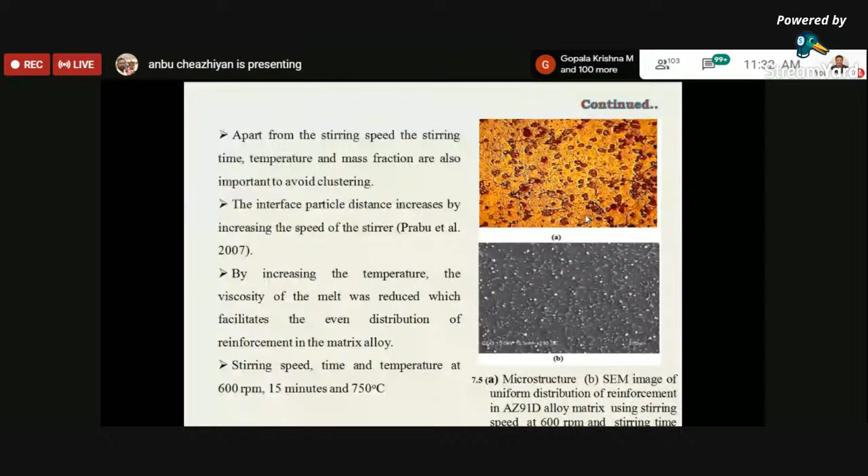These are the SEM images of the nanoparticles, glass nanoparticles, or sometimes hollow glass particles. These are the microstructures of magnesium nanocomposites, and still we have found some porosity on the surface of the as-cast and HD samples. On the surface of the metal we have seen some porosities, and through cross section we have seen the nanoparticles into it.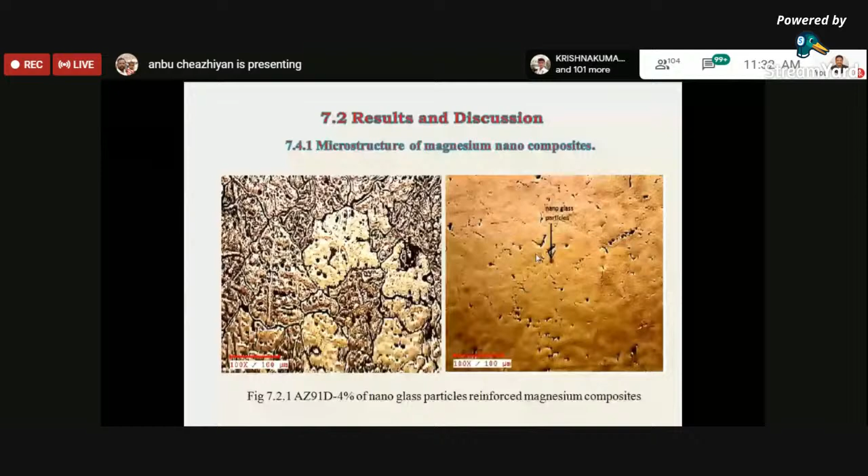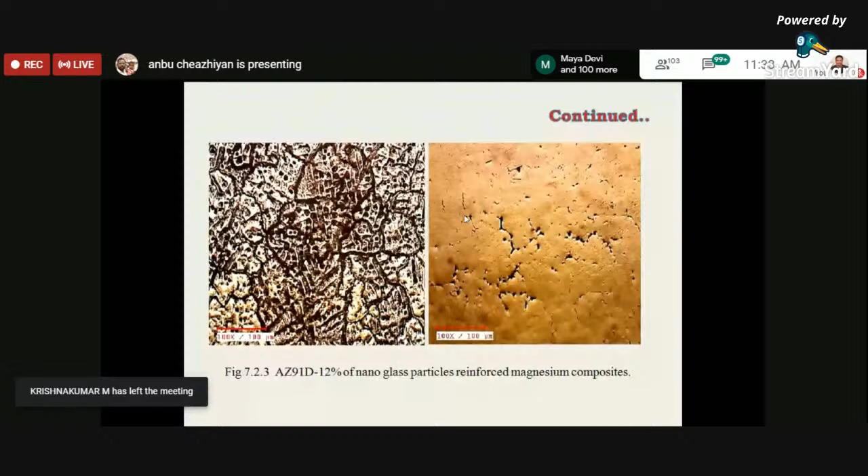But this needs to be avoidable, because of this the machinability properties cannot be carried out. So things need to be considered on improving the surface properties. That is another area in this research work.

From these microstructures, it has been observed that reinforcement particles are uniformly distributed through the cross section. It has been noted that grain boundaries of the magnesium matrix are enclosed with the nanoglass particles and were uniformly distributed, and we have seen some marginal deformation of glass particles.

Due to heat, it can't be dissolved. The marginal deformation of nano glass particles may be probably due to heat input. However, the majority of nanoparticles have retained the shape of spheres as shown in the same image.

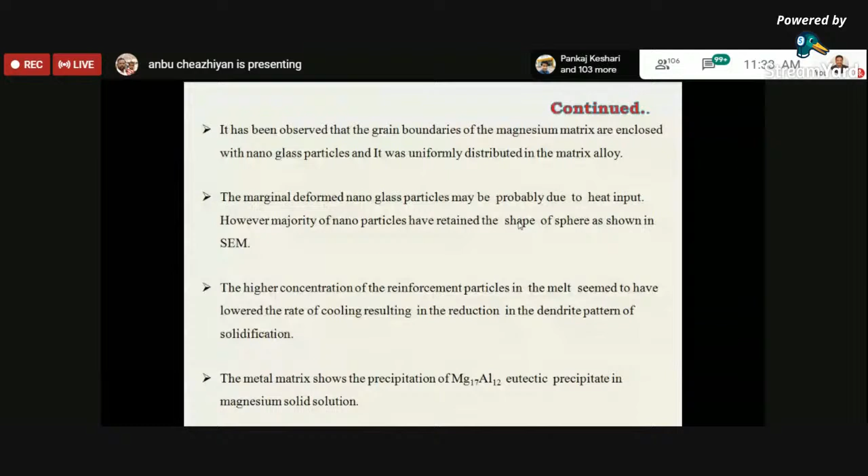Some glass particles tend to dissolve and interact with magnesium to form Mg2Si, because of the presence of borosilicate in it, which will enhance the mechanical properties, especially compressive strength of the composite.

It is also noted that a higher concentration of reinforcement particles in the melt seems to have a lower rate of cooling, resulting in reduction in the dendrite pattern of solidification. We have found that precipitates of Mg17Al12 as eutectic precipitates are found along the grain boundaries of the magnesium solid solution.

So the interfacial reaction plays an important role in strengthening the composites, as I told you earlier. With the presence of borosilicate, it interacts with the magnesium to form Mg17Al12 and Mg2Si. This Mg2Si acts as a strengthening mechanism to enhance the compressive strength of nanocomposites.

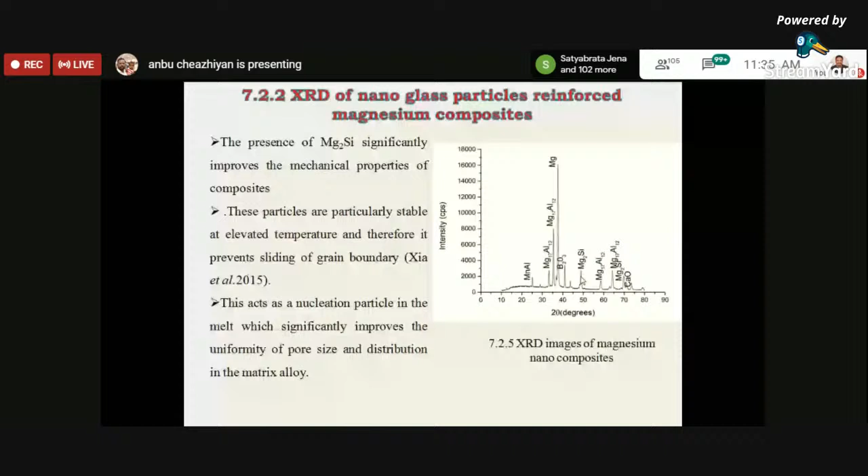These particles are present and are stable at elevated temperature, therefore preventing sliding of grain boundaries. This presence of Mg2Si acts as a nucleation particle in the melt with the significant alloy. It's just nano hollow particles, so uniform pore size has to be maintained.

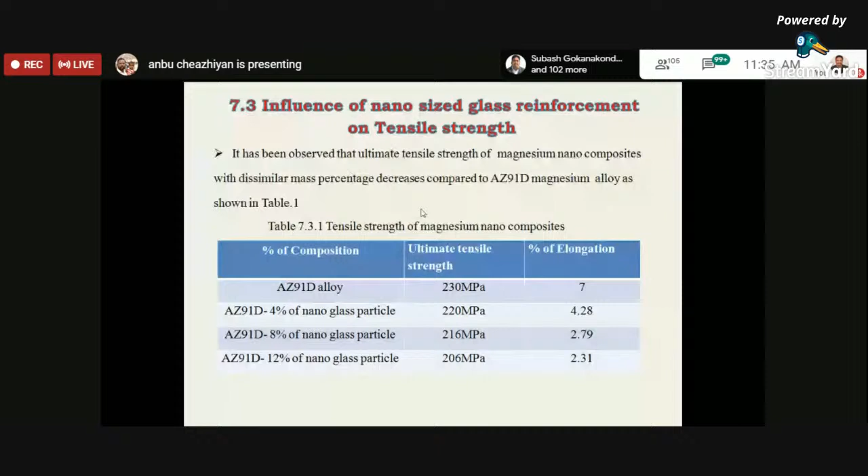We go to the influence of nano-sized glass reinforcement on tensile strength. As per ASTM standard, it has been observed when the composite has been performed that the ultimate tensile strength of magnesium nanocomposite with dissimilar mass percentage decreased compared with the AZ91 magnesium alloy. So it's not increased, it has decreased. The reduction in strength originates from weak adhesion among the ceramic particles between the matrix and the reinforcement particles.

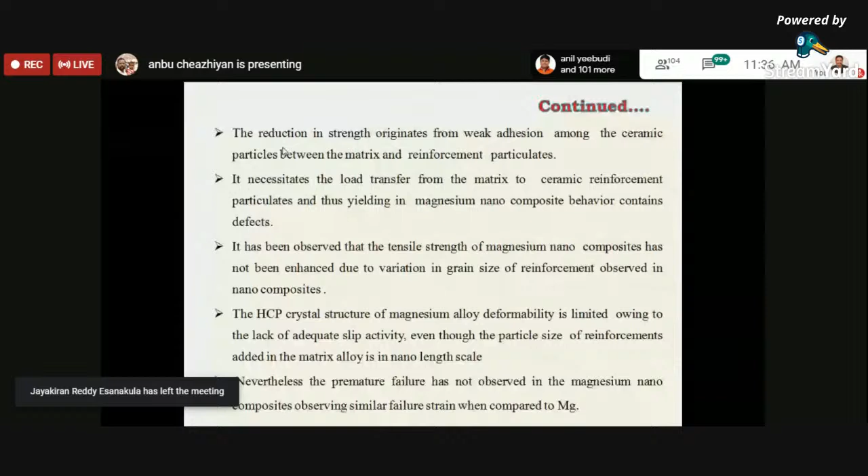Since the HCP crystal structure of magnesium alloys limits deformity, there is a lack of slip activity, even though the particle size of reinforcement added in the matrix alloy is nano length. Also, there is no premature failure observed in the magnesium composites.

So that's the compressive strength of the nano-sized reinforced composites. As per ASTM E9 standards, the compressive strength has been performed. It has been observed that the compressive strength of magnesium nanocomposite is higher than that of as-cast magnesium alloy. The compressive strength can be increased due to increase in mass fraction of the reinforcement in the matrix alloy. As I told you, the presence of Mg2Si at the interface with the matrix increases the mechanical properties.

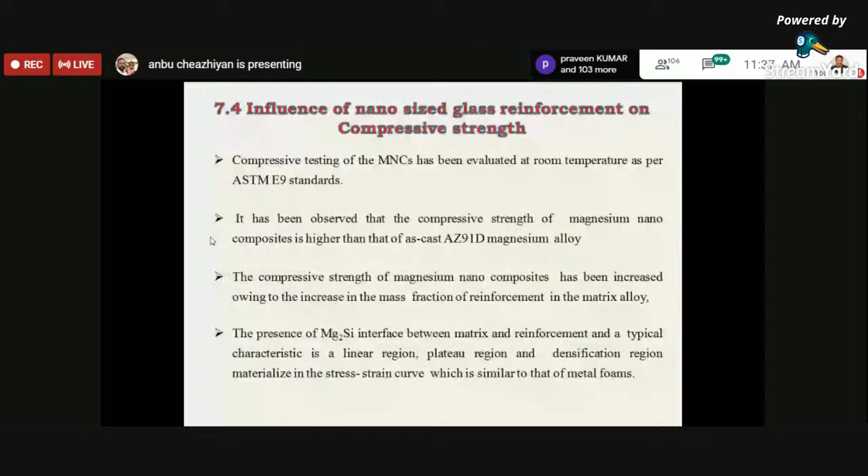It shows here typically a linear region, a plateau region, and a densification region in the stress-strain curve. As I say, it is similar to metal foams, where the stress remains constant up to the elastic limit. After that, it is the densification strain. This strain region is called the linear region and densification region.

In the linear region, the compressive strength of nanocomposites deforms linearly, then plastically, followed by a drop in stress entering into the plateau region. In this plateau region, the stress remains constant. It can withstand the load transferred from matrix to the reinforcement. Finally, the nanoglass particles tend to break at this maximum strength present, and due to that the stress level remains constant, appearing as a flat and stable region with increasing slope.

Finally, the densification strain depends upon the level of porosity entered in the nanocomposites. So it is similar to that. During compression testing, the compression material fills up. Sometimes there will be some matrix porosity absorbed in that material, as I showed in that microstructure. That can also be filled during compression, that is, the matrix material fills up the matrix porosity.

So when the nanoglass particles tend to fracture, the matrix porosity embedded within them is disclosed, and thus occupies and compresses the material. This causes the enhancement of compressive properties of nanocomposites.